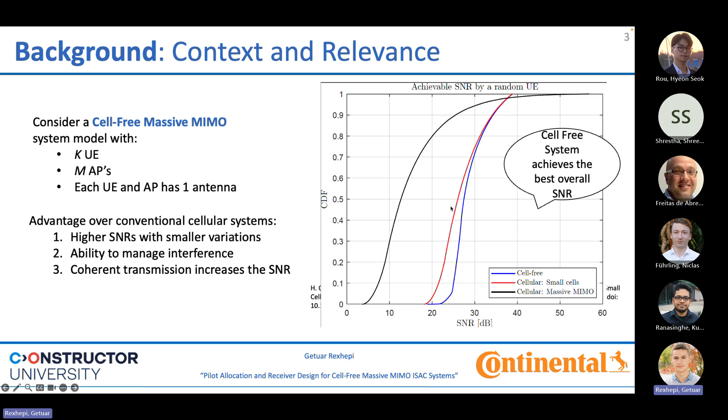Now, what is the problem with cell-free massive MIMO? We're going to discuss today the problem with channel estimation, more precisely, the pilot contamination problem. So as you know, channel estimation is crucial for all coherent wireless communication systems. And to do channel estimation, some pilots are sent before the data is transmitted as reference or known signals. But due to the limited coherence interval, we cannot send pilots for each user, especially when the number of users increases. So we have a limited number of pilots.

Thus, the phenomenon of pilot contamination occurs as described by the figure with the red arrows, where both users are using the same pilot. Now, this pilot contamination leads to system performance degradation and bad user experience. And as I mentioned before, this problem becomes even more pronounced when the number of users increases.

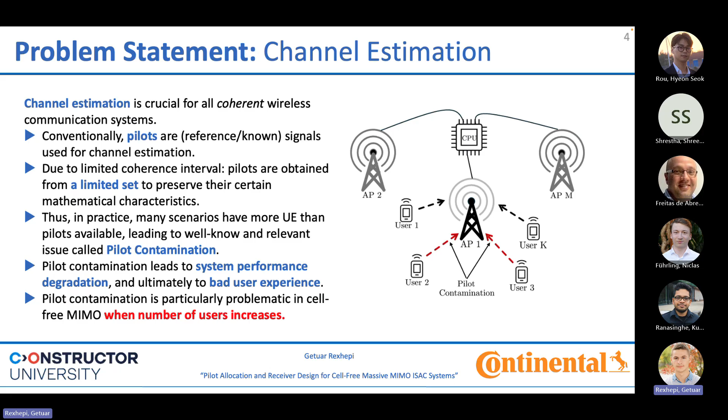Now, to quantify our problem, we first have the MMSE estimator as shown by this equation, where tau is the pilot length, rho is the pilot power, betas are the fading coefficients, and in the denominator we have the noise and the interference caused by the pilots. Now we know that pilots have the property of orthogonality because they come from an orthonormal basis, but these pilots will be reused, and that's where we have pilot contamination.

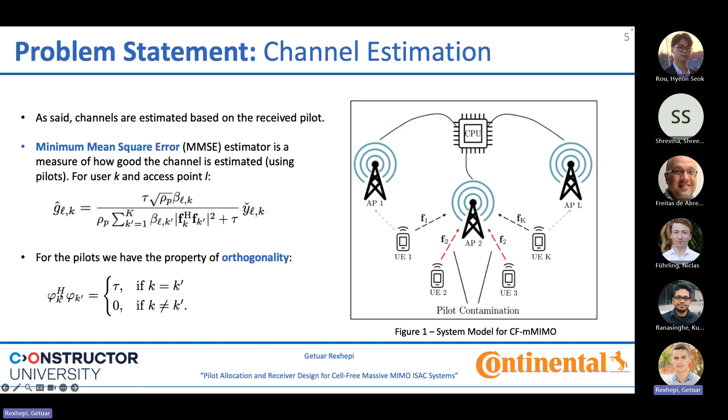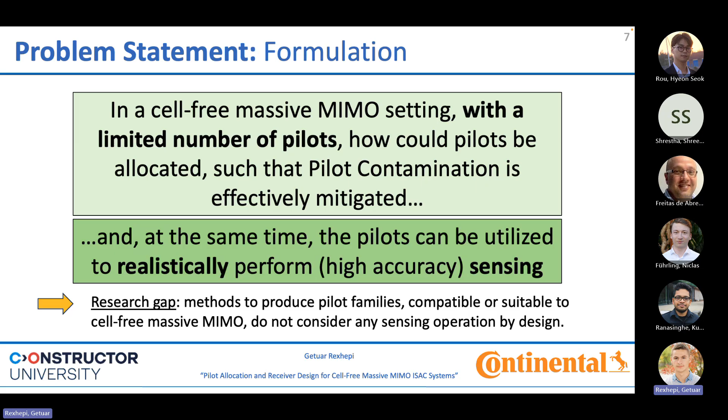Now, what we want to do is, when we have a limited number of pilots in a cell-free massive MIMO setting, how could these pilots be allocated so that pilot contamination is mitigated and at the same time the pilots can be utilized to perform high accuracy sensing? So we have to be clear that there are already existing methods to produce pilot matrices suitable for cell-free massive MIMO, but none of them consider any sensing operation. So by considering this, our work is very new, novel, and original.

Now, the general formulation that you can find in a paper that considers the pilot contamination problem can be formulated as an optimization problem such as this, where you maximize the sum rate or the throughput such that the pilots are contained in a pilot orthogonal matrix, and P is the assignment solution that needs to be assigned to each user.

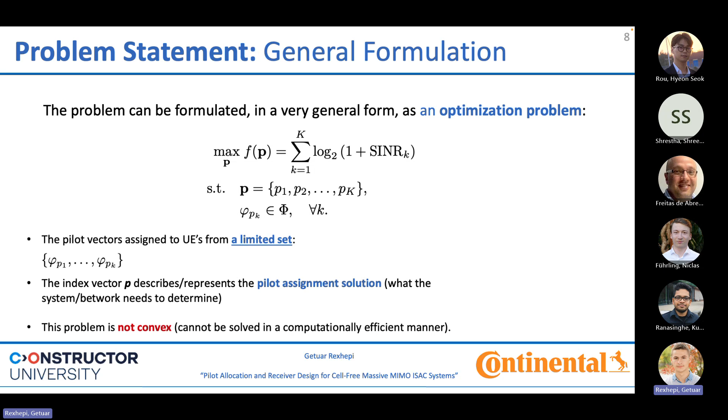Now, as you can see, this problem is highly non-convex and cannot be solved in a computationally efficient manner because you had to do an ML search to see which pilot needs to be assigned to which user such that the throughput is maximized.

Now, to deal with this, our main idea of the solution is to redesign the pilot matrix such that the sum rate is maximized. But in addition to this, we also constrain the entries of the pilot to unit absolute value, or unimodular, such that we can use these pilots to perform high accuracy sensing.

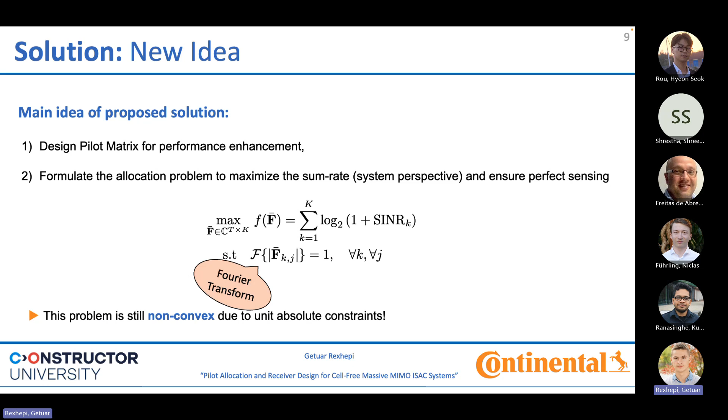Now here, the constraint quantifies what I said, where the Fourier transform of each element of the matrix has absolute value 1. Again, this problem is still non-convex due to the unit absolute constraint, but for this we can use our tricks from manifold optimization to solve this problem efficiently.

Now, why would you use such a constraint? Why unimodular? It is already known, especially in the ISAC area, that for enhancing the sensing performance, you have to constrain your signals to be on the unit disk, and this comes from the very fact that the integrated side lobe level, also known as ISL, in this case is 0.

This can be proved very easily by using Parseval's theorem, as can be seen here, where the autocorrelation R_k is the Fourier transform of the power spectral density, and then by doing some manipulation, you can see that by designing your signals on the unit disk, this sum goes to 0, and thus you have perfect sensing performance, or 0 side lobes.

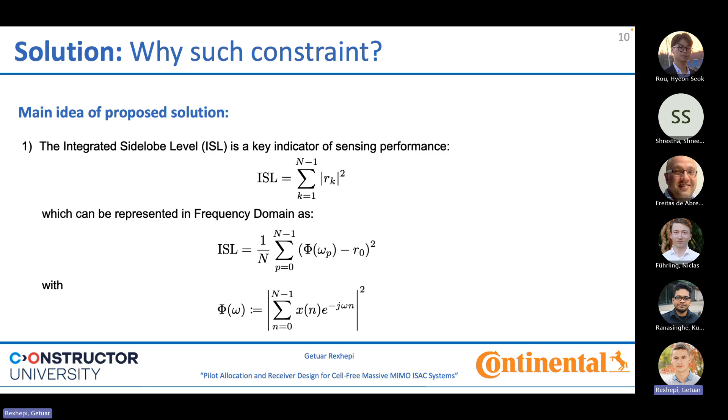In the spirit of this, we tailor our own algorithm, a complex circle manifold algorithm, with a closed form gradient, which makes it efficient, and it's basically composed of 3 main steps: retraction on the manifold, closed form gradient update, and then manifold tangent projection. And at the end, you have your final pilot matrix, which will enhance the total sum rate and sensing performance, as we will see in the results soon.

Now, it should be mentioned that the new matrix that we designed can be easily integrated in existing systems by just doing a simple linear combination. What I mean by this is you can go from your original orthonormal basis F to F bar by just doing a linear combination of your original F. So that's not a big deal at all. You don't have to change the whole algorithm in your existing cell-free massive MIMO. It's just a linear combination between these two.

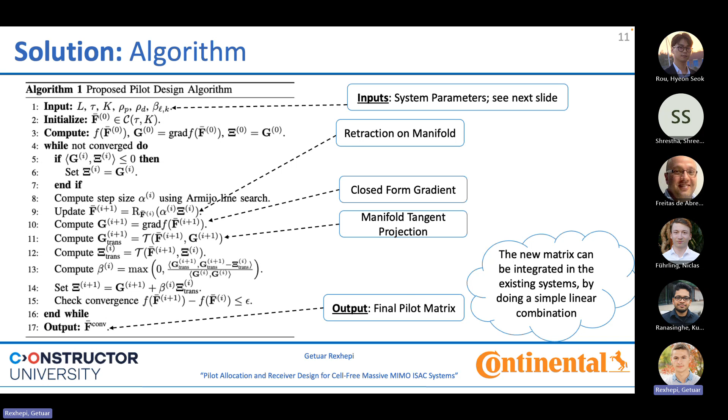Here I show the closed form gradient because, as you saw in the SINR expression, you can see the pilot dependencies in both the numerator and the denominator, and it's not trivial to derive the closed form gradient. And in this slide, I also show the complexity analysis and comparison with state-of-the-art pilot methods.

So one of the current state-of-the-art methods was tabu search, which has this complexity. And if you compare it to the proposed one, you can see that there is only a linear term in addition to the tabu search complexity, but this can be justified by the huge gain in sensing performance that we see. On the other hand, the optimal solution, as you can see, is exponentially increasing: tau to the power of K, where K is the number of users and tau is the pilot length.

And the random solution, which is the worst, of course, because you just randomly allocate the pilots, is linear. And also the greedy, which does a similar job to random but also considers pilot contamination, is linear in the number of users and APs. But in the table at the left, as you can see, even though the complexity of our proposed idea is not as good as random, we offer both sensing and unique pilot design with reasonable complexity.

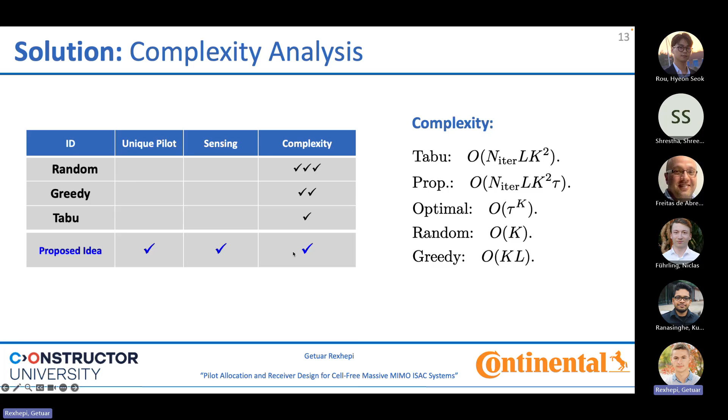Now, let's see the simulation parameters of our experiment. Our simulation experiment is very realistic in the sense that we consider a realistic path loss model and also shadow fading for the channel itself. We consider both large scale fading and small scale fading, where for the small scale fading coefficients, we assume only statistical CSI, meaning we know only the statistics of the matrix H. But the betas we assume we know, or we measure them beforehand.

This is the path loss model, which comes from a 3GPP standard. And in the table, we have the carrier frequency, bandwidth, noise figure, AP height, UE height, the power rho, the power of the pilots, and the standard deviation for the shadow fading. Our experiment consists of a square of 1 kilometer by 1 kilometer, and the distances in the path loss model are 50 and 10 meters, to realistically see how far the users are from each AP.

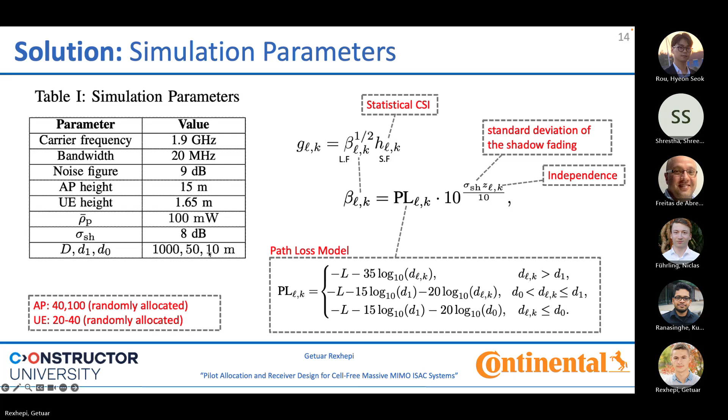Now, before we go to results, I would like to give some intuition about what is happening exactly with the pilot design. If you consider the state-of-the-art algorithms, you have a tau by tau pilot basis matrix where you have tau pilot sequences, each of length tau. So this is a square matrix.

And then what the existing algorithms do to assign pilots to users, for example the greedy or the tabu search, is just take the existing pilots and assign to the K users the existing pilots. So the same color is reused. In this sense, reusing the same color creates cross interference.

On the other hand, in my proposed pilot matrix design, you have variations of the same color. So, for example, the first user and the last user are not the same, but quite similar. So there are variations of red, or the third user and tau plus one user are variations of blue. And these variations of colors allow for less cross interference, which means that these are almost orthogonal, not orthogonal because of the dimensions.

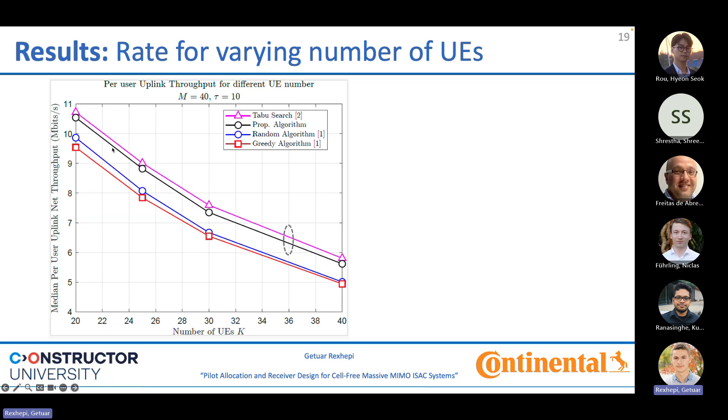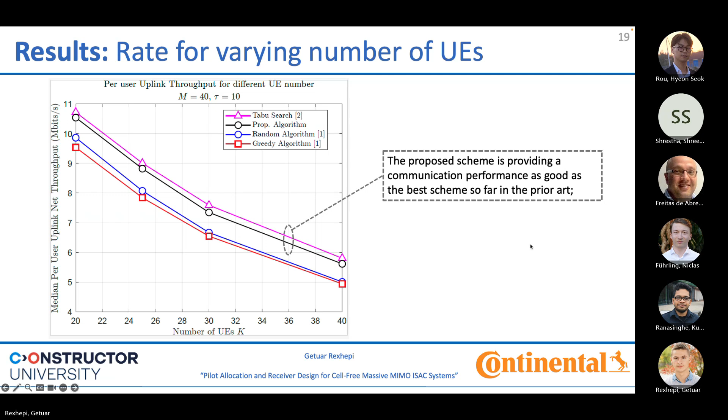Now, I also have a ranging estimation problem, but I cannot see it here. Let me just clear this. Okay, here. Sorry.

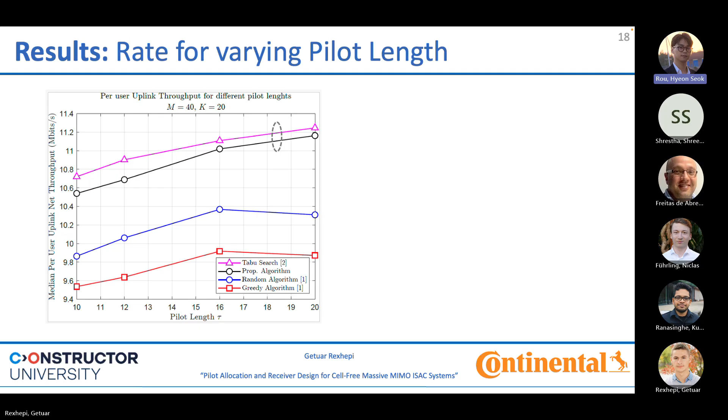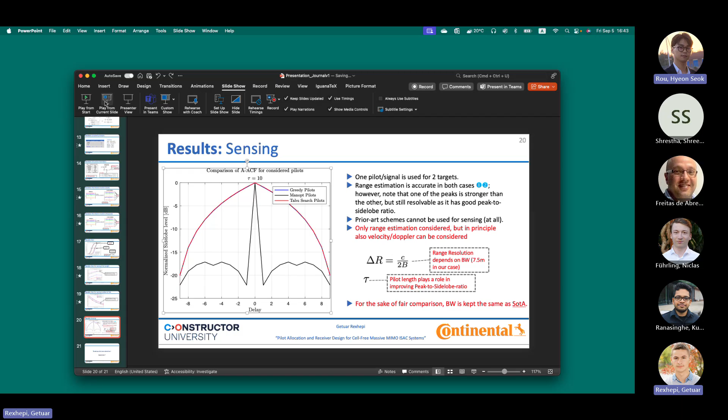And the second one is for page 20, the ranging, or maybe one before. You mean the other figure, the autocorrelation? Yeah, but here it's also fine. So the question is, it says the tau here, the pilot length, plays a role in improving the PSLR of the ambiguity function, right? Could you elaborate on how that is the case, if you have a specific relationship? So I also had the plot for this, but I didn't include it. Maybe this was my mistake.

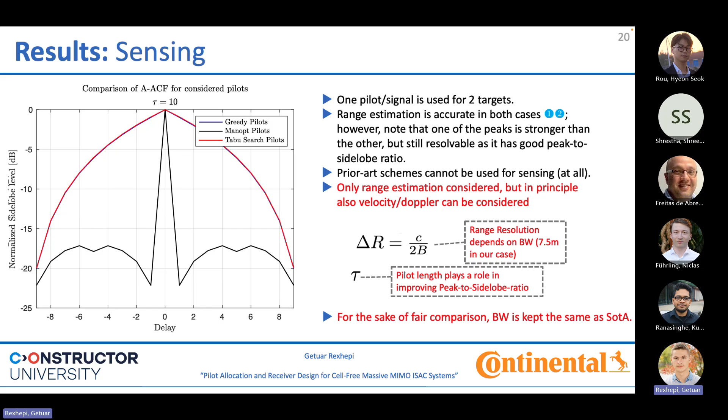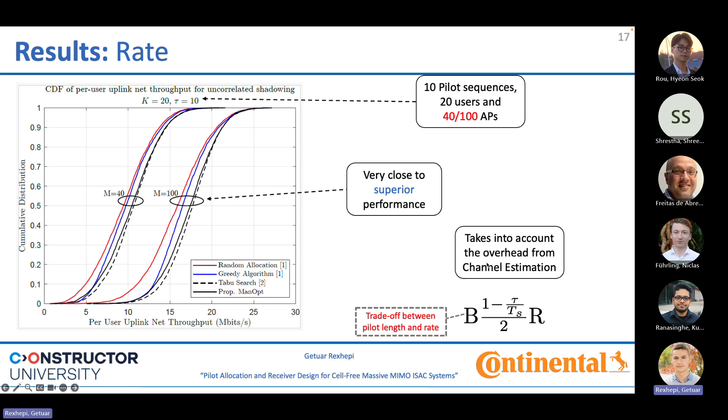This is only for 10, and it scales with the number of pilots. And this is only with the proposed method, because the other ones do not have this characteristic. But you cannot use very long pilot sequences, because as I said, there is a trade-off between pilot length and rate. If you use a very long pilot, the rate will decrease. Finding the optimal trade-off is another problem we discussed internally. Okay, thank you, that's it for me. Thanks, Eric. Anybody else?

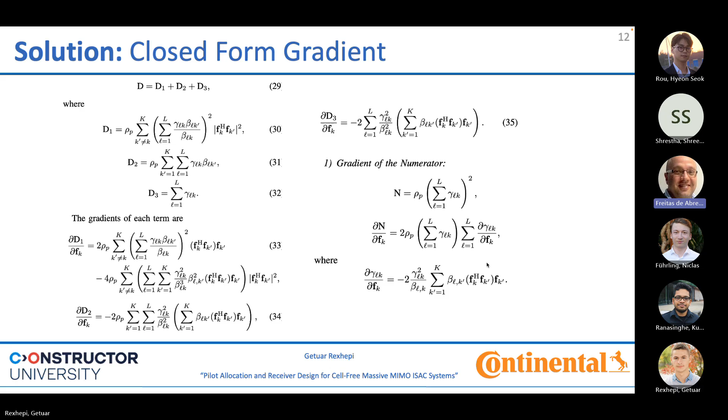Maybe while you think, I do have one question. Can you bring us to the equation where you model the interference as a consequence of pilot contamination? You should have a received signal model. Well, this is already in terms of SINR, but that's good enough. I have it in the paper, but not here. My question is: looking at this equation, it is assumed that everybody's symbol synchronized, right?

Meaning all the pilot sequences are used such that all the signals arrive synchronously, correct? Yes, this is an assumption. This does not include the case where one transmitter is one symbol delayed with respect to the other, which can happen simply because of distance, one guy very far away. Then you'd have not only the symbol synchronous cross correlation sum, but several sums for all the non-synchronous cross correlations. Have you thought about that? It would make sense to consider at least a one symbol delay, and I'm wondering how robust the design would be.

No, I never considered it. I always assumed it is coherent and synchronized. But this is another research direction, I think. Maybe it could be extended into that case. All right, anybody else?